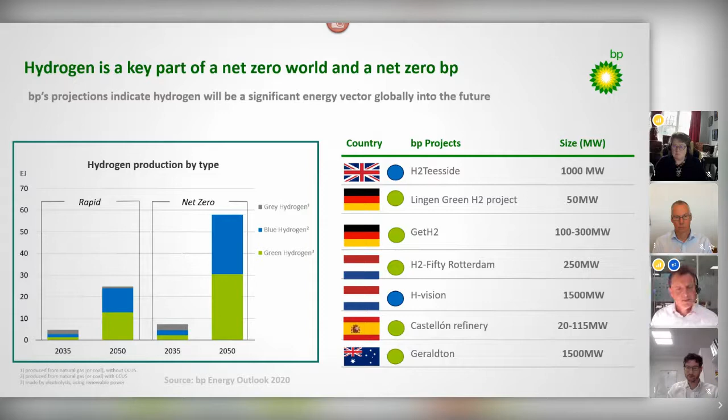Every now and then in a career, you get to work on a project that makes a real difference, and I feel very lucky to be part of the decarbonisation plan for Teesside and the broader Northeast.

BP is the operator for the Northern Endurance Partnership, which is the CO2 store which will underpin the East Coast Cluster. The East Coast Cluster can store 50% of the UK's industrial cluster emissions, which is an enormous step in setting up the UK for a sustainable low carbon future.

Historians among you may recognise Darlington on the map as being the setting for the first steam passenger railway about 200 years ago. 100 years ago, Teesside was responsible for a significant proportion of the world's steel production. As far afield as Australia, the iconic Sydney Harbour Bridge was built with Teesside steel. Today, it's at the centre of a low carbon revolution.

Across Teesside and the Humber, there's the potential for 25,000 low carbon jobs. These are long-term jobs, attracting new businesses, new investors. And one of those new businesses is hydrogen, and particularly blue hydrogen, which is enabled by the carbon capture process.

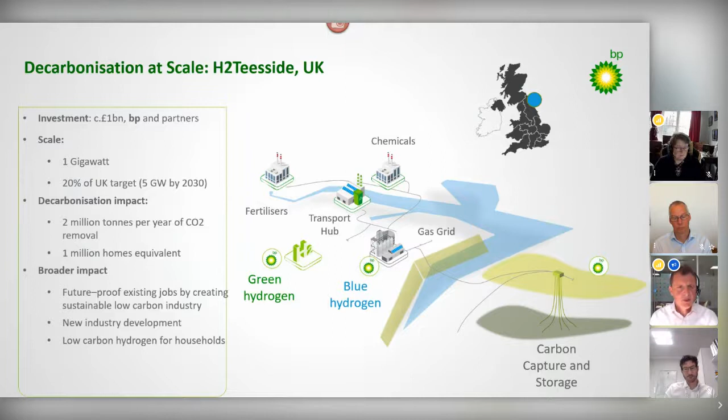But none of this happens without the customers. So on the next slide, I'm going to just touch on some of the key customer types.

In the near term, industrial use is going to be key for adoption of hydrogen across many applications. This is heating, power, chemical input, and the production of new clean fuels. We do believe that in these applications, in fact all the applications on this slide, low carbon hydrogen is the lowest cost net zero option for the world.

We've signed MOUs with a number of customers across a range of industries who all see the benefit of using clean hydrogen. In the longer term, it will become a key element of transportation with uses in trucks, trains, aeroplanes, and ships. For some of these, like trucks, the hydrogen will be used directly. For other cases, like aeroplanes and ships, it will be converted into other clean fuels like ammonia.

This all provides further investment opportunities around the Teesside area, and it is great that Teesside has been recognised as the UK's first hydrogen transport hub, and we're very pleased to be working with the Tees Valley Combined Authority on this.

Lastly, on buildings, we're working with Northern Gas Networks to try and get hydrogen into the gas distribution system. They're making great progress on this, and it does open up the opportunity for everybody to start benefiting from the hydrogen revolution.

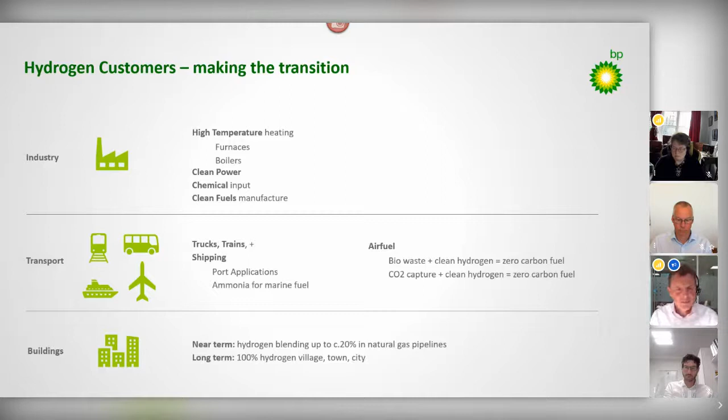So to move to my finishing slide, I'm just going to summarize. Clean hydrogen, it's going to be big. It's happening now. BP's in action across production of green and blue hydrogen, working with customers across the globe. And UK is dear to my heart. I see what's happening in Teesside and it's amazing. We think that's a great place to start the decarbonisation revolution. That means Northern Endurance Partnership for carbon capture and H2 Teesside from a blue hydrogen production perspective.

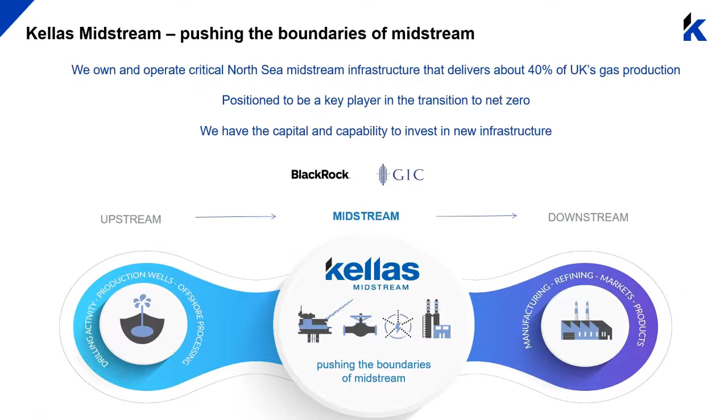So let me talk about our core asset. Our core asset is the Central Area Transmission System, otherwise known as CATS. CATS is a major gas transport and processing system. It gathers gas from around about 30 producing fields in the central North Sea, processes the natural gas at a terminal in Teesside, and delivers the resulting products to market.

So we're incredibly proud of our track record on both safety and environmental performance, and I think the stats on this slide speak for themselves. CATS has an enviable safety record and has the second lowest carbon intensity of all UK gas processing plants. We've also got plans in place to reduce our emissions further over the next 3 years, so that by 2025 we will have halved our emissions from when we first became the owner.

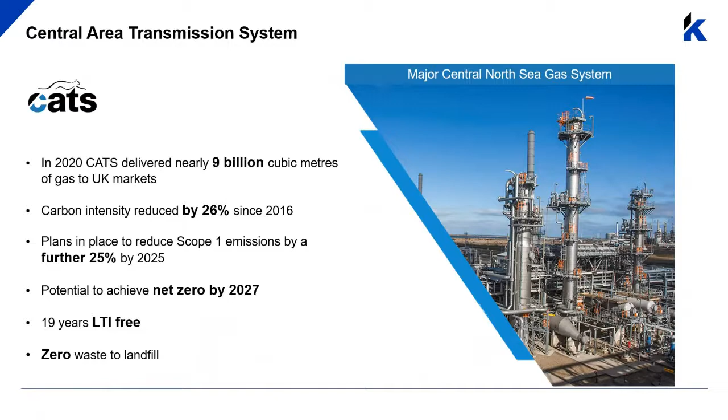But we don't want to stop there. By 2027, we have the potential to make CATS a net zero asset. This brings me nicely on to our exciting new plans for CATS, the H2 Northeast project.

So Matt's already talked about the East Coast Cluster, and we joined it earlier this year, which covers both Humber and the Teesside industrial regions. Matt's mentioned the East Coast Cluster offers us the single biggest opportunity to decarbonise industry anywhere in the country, representing about 50% of carbon emissions from all UK industrial clusters.

H2 Northeast is a 1 gigawatt blue hydrogen plant to be developed at the CATS terminal on Teesside. We'll utilise the Northern Endurance Partnership to dispose of our carbon within the East Coast Cluster, capturing and storing around 2 million tonnes of CO2 per year.

But why the CATS terminal? The CATS terminal has access to natural gas from a range of fields, creating a diverse source of long-term gas supply. It's already connected to the national grid, which makes it ideally suited to blending hydrogen, which is by far the most efficient way of reducing domestic emissions by decarbonising at source.

The CATS site is also an existing industrial site in the heart of Teesside with space for expansion and is operated by a skilled and experienced workforce. So H2 Northeast has the ideal site with direct source of feedstock and access to the industrial and domestic markets, is underpinned by a world-class operating plant and workforce, and has the track record of Kellas and our financial backing as investors to deliver it.

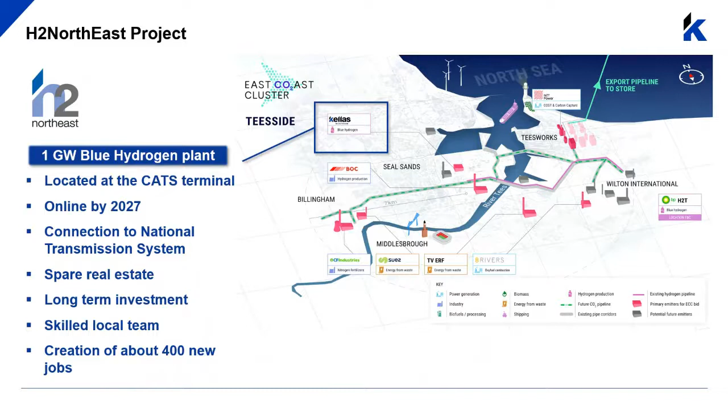So if I can just summarise, where we are: the energy transition requires huge investment over the coming decades, and the oil and gas industry has to be a fundamental part of the solution. Demand for hydrocarbons will reduce, but will not be eliminated, as some hydrocarbon products, such as medical supplies, will continue to be needed. We need the skills and knowledge from the oil and gas industry to deliver carbon capture and storage and to develop the hydrogen economy.

And blue hydrogen is the only way to kickstart the hydrogen economy at scale. Our H2 Northeast project is a great example of how you can transform CATS, an existing top-performing asset, into a net zero asset for the future. Kellas has the track record, skills, and access to capital necessary to make this happen, and we're ready now.

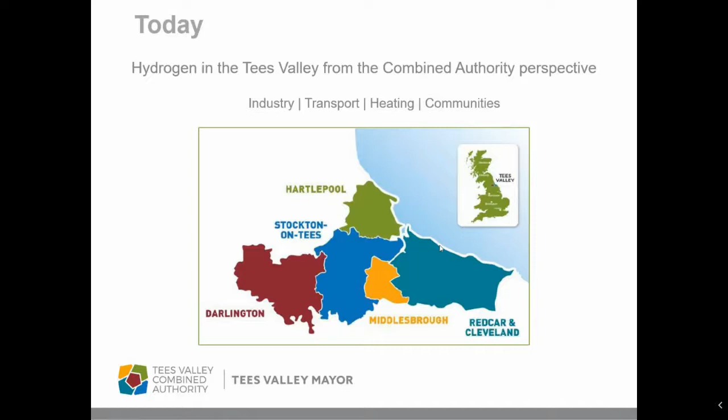So the Tees Valley, in case you don't know, sits in the northeast of England. It's roughly between Newcastle and Hull, and about halfway between London and Edinburgh by train as well - it's a well-connected region. The role of the Tees Valley Combined Authority is to promote the area in terms of the economy, the well-being of people, and create jobs and inward investment.

It's a very, very strong industrial area, and the industry is all tightly packed into the region - I'll show you that on the next slide. It's got a long history, and I was very grateful for Matt describing some of the history way back to the first passenger railway in Darlington and the steel industry 100 years ago. We've got chemicals manufacturing, materials manufacturing, import energy and generation, logistics, and so on. There's a lot going on in the Tees Valley.

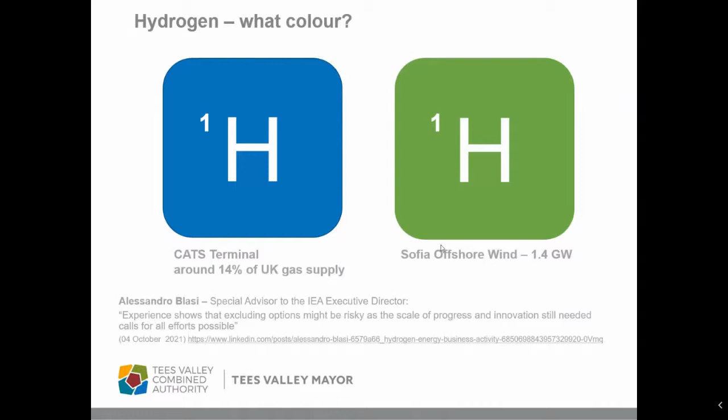So we cover several themes in the Tees Valley for hydrogen. We're looking at the industrial cluster and how hydrogen can be used by industry, we're looking at transport, we're looking at housing, and it's also important to consider the effect on people and communities.

What's going to be very important, bringing hydrogen online as an alternative fuel source, as a new fuel source, is that we have a just and equitable transition here. Whether we call it just and equitable or fair and affordable, it's the same sort of thing. It's not going to put more people in fuel poverty - we've got to help get people out of fuel poverty. We've got to use this opportunity to create jobs and skills, and it's an opportunity to create the green revolution on Teesside and start exporting these skills and technologies as well.

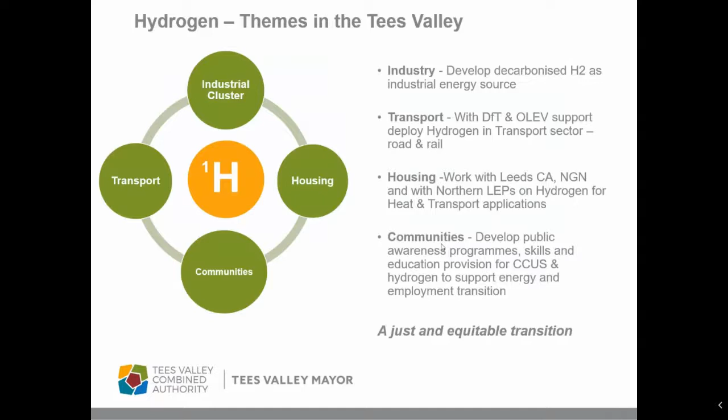In terms of industrial decarbonisation, we're working through the BEIS Industrial Decarbonisation Challenge, funded by BEIS through UK Research and Innovation, Innovate UK. They're funding 6 clusters around the UK with the aim to have 4 low carbon clusters by 2030 and 4 net zero clusters by 2040, and the Tees Valley cluster plan is one of those 6 clusters being funded in this way.

And that's my day-to-day job, working out the strategic cluster plan, which brings together all the different aspects to decarbonisation: hydrogen, renewable electricity, and carbon capture usage and storage, and how these integrate together, how the different industries on Teesside will use these and can work together, and the sort of strategic planning we need to make it real and happening.

Matt also talked about the East Coast Cluster, and they're currently bidding for funding through BEIS's cluster sequencing competition, and we're all eagerly awaiting the end of October when the announcement for the Track 1 clusters will be made.

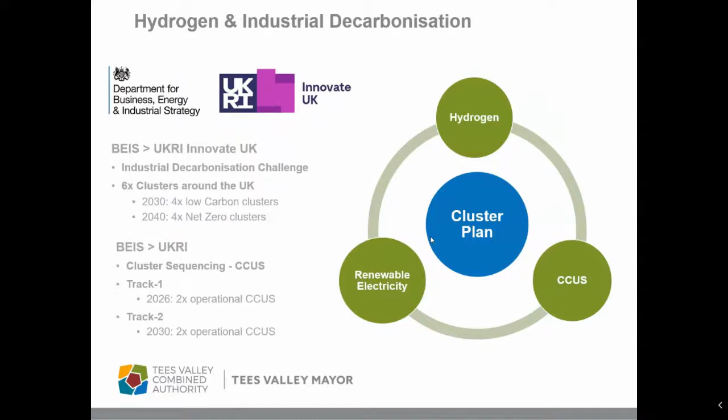In terms of hydrogen transport, we've been designated as the UK's first hydrogen transport hub. We've got 2 hydrogen refueling stations in development in Middlesbrough and Redcar. At the airport, which is partly run by Tees Valley Combined Authority, we have 1 aircraft tug, 2 hydrogen fuel cell cars, and 1 hydrogen converted forklift truck, with trials there to decarbonise the airport ground services using hydrogen.

In terms of housing and communities, Northern Gas Networks is currently working on a project on a former housing estate in the Redcar area. About 70 houses were demolished there around 10 years ago, and all the services, gas mains and so on, still remain in the ground. So this is a really good test site for Northern Gas Networks to test hydrogen in an actual network delivery system for domestic properties. We're also working with Northern Gas Networks to bid for the UK's first hydrogen town—potentially 10,000 homes converted from natural gas to hydrogen heating systems.

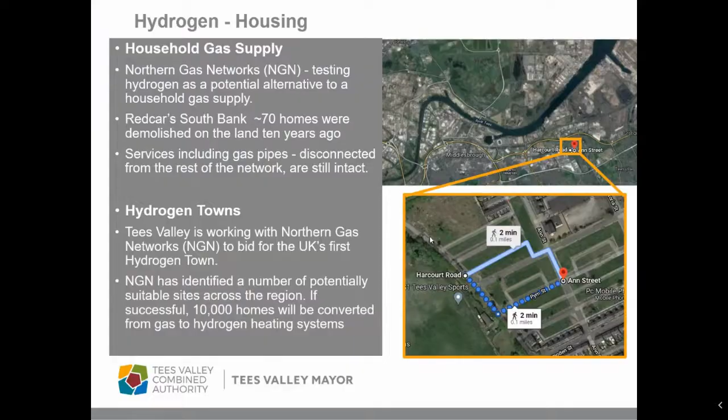Our vision at Tees Valley Combined Authority is to make the Tees Valley a global leader in clean energy, low carbon technologies and hydrogen. The aim is to achieve a net zero carbon industrial cluster by 2040, to provide good jobs with long-term prospects that local people can access. So thank you very much for having me speak today.

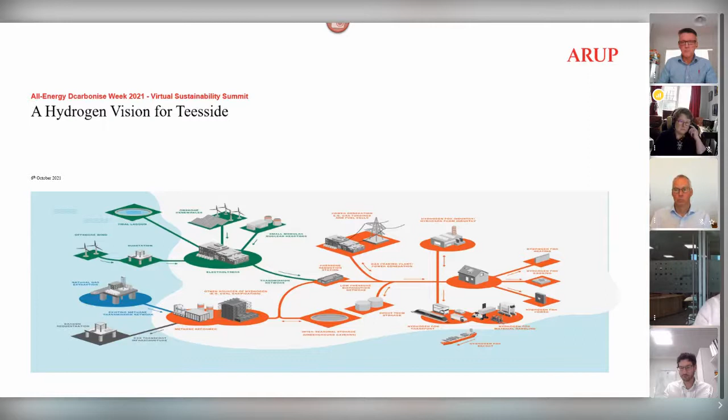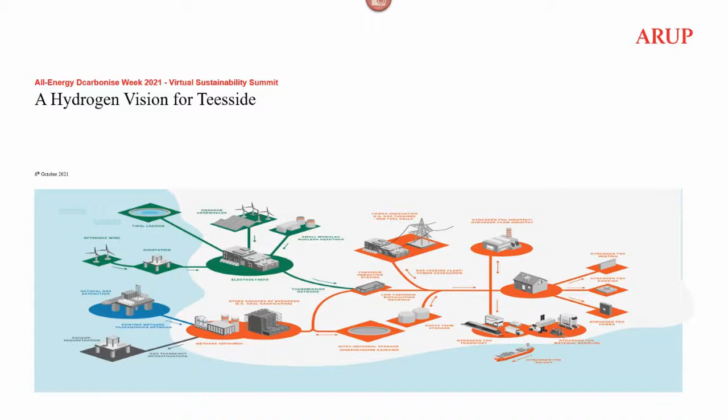So I'm going to talk a little bit about the hydrogen vision for Teesside, and the previous presenters have already given quite a lot of the material away, so I'm trying to gain time and go relatively quickly. What's important when you look at an industrial cluster, of any kind, is to bring together three key components. One is a vision to understand what is the ultimate objective, the ultimate goal of where we want to go. The second is trying to bring the stakeholders together, and finally you need a business case for that particular vision to come together and go forward. Once you've got those three components together, then you have a roadmap to actually deliver it on time, because we are running, as you all said, against the clock in terms of achieving net zero.

If you can go to the next slide, please.

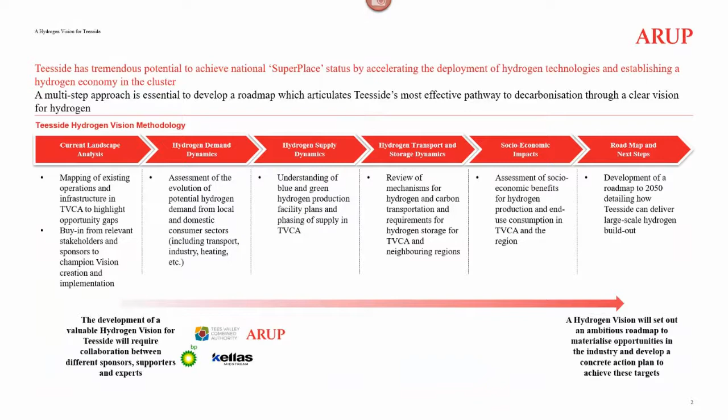Okay, so in terms of the work that we're currently collaborating on with the key stakeholders, we know that these represent a tremendous potential opportunity to achieve decarbonization.

The first step is looking at the current landscape and what is there on Teesside - we've already seen quite a lot of this in what Chris presented earlier around what is in the area. So there's a bit of mapping and trying to understand what's currently in Teesside, and imagining what Teesside might look like in the future. It's an assessment of the existing network, the existing assets, the existing capabilities, and the existing sources of demand, then connecting them to what they might be in 20, 30 years' time. That's the first step - an assessment of what is there and what it might look like.

So we are looking to develop a map of the existing assets and the existing network, and then look ahead, playing around with the various potential options you might have to achieve net zero clusters.

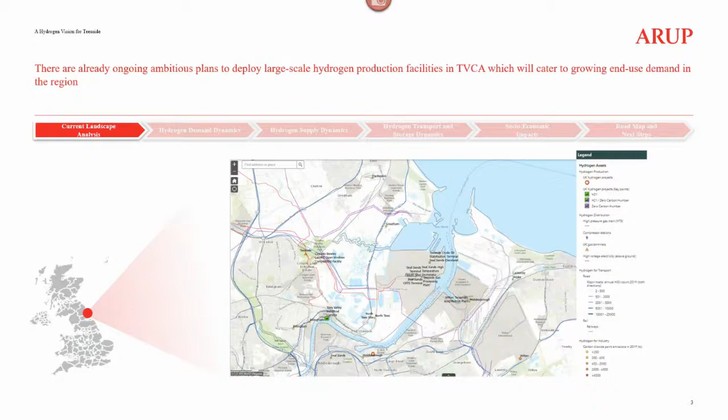So once we've looked at the potential vision and the stakeholders, the next step is trying to understand the business case for the Teesside hydrogen cluster. We looked at it in three parts of the supply chain. So the next slide looks at...

the demand side first - what is the potential demand for hydrogen, how can we estimate that? There are obviously a number of scenarios you can paint. But the first step is trying to understand the current emissions and the future plan for decarbonizing emissions, and the role hydrogen can play in that decarbonization.

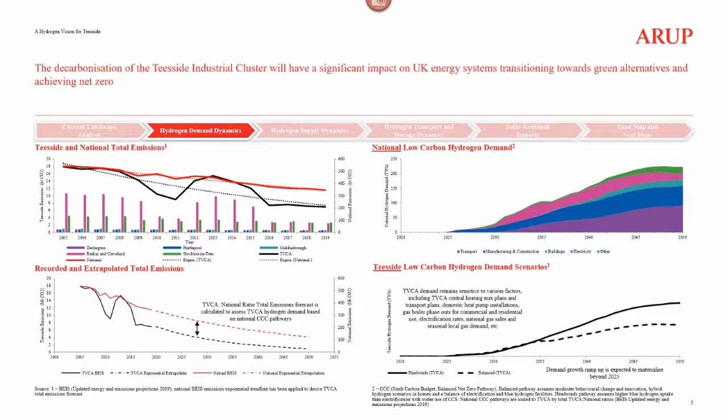Then once you understand the demand a little, you need to look at the supply. So in the next slide, we show this potential supply of hydrogen and where it might come from. You can break it down - here for simplicity, we break it down into blue and green. And as we said before, there isn't necessarily a preference for either - all technology and all components of the hydrogen supply chain will be needed.

But it's more likely - and this is just one hypothetical scenario - that you may have blue hydrogen at an early stage and green hydrogen later on. The combination of those two will vary depending on how the projects we just heard about develop over time. You build up over the first few years and then it tails off in later years in terms of new capacity added to the system, particularly as we move to a longer-term, more green hydrogen future.

And then you combine that with the level of demand, and you could in theory come to a situation where there's an excess of hydrogen produced in the industrial cluster. Therefore Teesside will contribute to the overall achievement of the national hydrogen strategy through export, or through the contribution it may make to other regions as well.

The industrial cluster involves a lot of hydrogen production, which you can then take to other regions as well.

The other component to keep in mind is hydrogen's variability—not necessarily over the years, but also within the year. There are seasonalities and daily demand changes, so the role of the network and potentially storage is going to be very important.

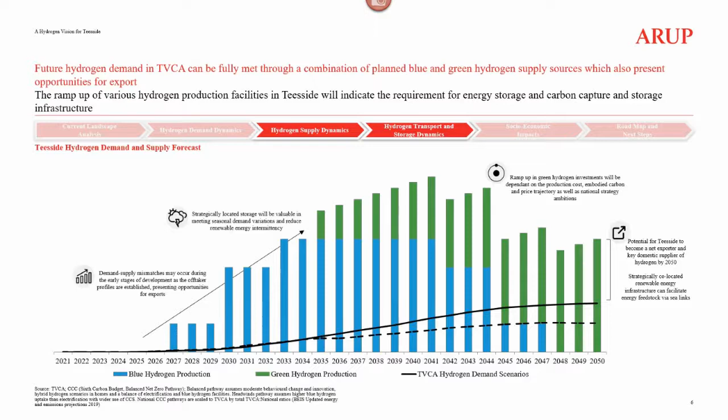It will provide a boost to economic activity. It will probably diversify revenue streams because it will support business growth and also inward investment in companies locally, as Chris was highlighting earlier on.

It provides social benefits by increasing the level of skills and developing a fit-for-purpose labor force, which will support the development of subsectors and emerging sectors. It could become a center of excellence for hydrogen in the UK, increasing that level of potential skills, education, and jobs.

It also has a very important environmental contribution in terms of improving the sustainability of the supply chain, promoting low carbon fuel in the cluster, but also across the UK as well.

There are certain milestones already set by the government and local authorities, but how Tees Valley will fit into that is very important as well.

Thank you. I'll pass it back to the last speaker now—I believe it's Rob, I'm not sure whether Rob is on, I can't see at the moment.

Oh, Richard, sorry. Hi there. Thank you, Filippo, and it's great to be part of this conversation today.

Thank you, everybody. I'm going to shift the conversation very slightly, both geographically and in terms of technology. I'll be focusing now on green hydrogen in a bit more detail, and much more on the Humber, which is where Ørsted is based at the moment for a lot of our offshore wind projects.

I think the first thing to do is set the scene of what that challenge looks like in the Humber. You can look at all the figures in detail here, but as you can see, the Humber is a huge industrial emitter in the UK—by far the largest at the moment—and has a huge industrial base.

It has a lot of similarities with Teesside, which, as well as geography, is also why the industrial makeup is why we're working so closely together on the East Coast Cluster. You're looking at a lot of refining, chemical, steel, and other similar industries.

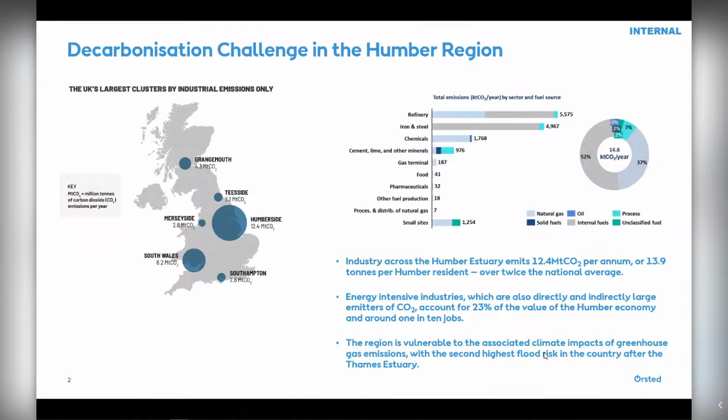And actually, just like in Teesside, as we'll look at in a minute, you have a large number of different consortia working together on different projects looking at the production of storage—companies that need to produce hydrogen, and companies that need to use hydrogen and have the demand.

And you're similarly looking at a number of pipelines, both transmitting hydrogen around the region and also taking their CO2 offshore for sequestration. So there's a huge amount of similarities going on. However, the main difference here for Ørsted is that we're an offshore wind developer and we're a renewables-only company.

Looking at why Grimsby, the Humber, and this area is such a ripe opportunity for green hydrogen - we also call it renewable hydrogen - it's just the capacity of offshore wind that we have in that area. If you add up our Hornsea 3 and 4 projects, which we're developing now, we're going to have a capacity of around 9 gigawatts of offshore wind in the next few years. And that's just Ørsted alone. That doesn't bring in the other developers in the region, and it also doesn't bring in the vast expansion in offshore wind that's going to continue throughout the 20s, the 30s, and the 40s.

There's a phenomenal resource in wind. And it was alluded to earlier as well, there was a large amount of resource further up the coast as well for the Teesside cluster.

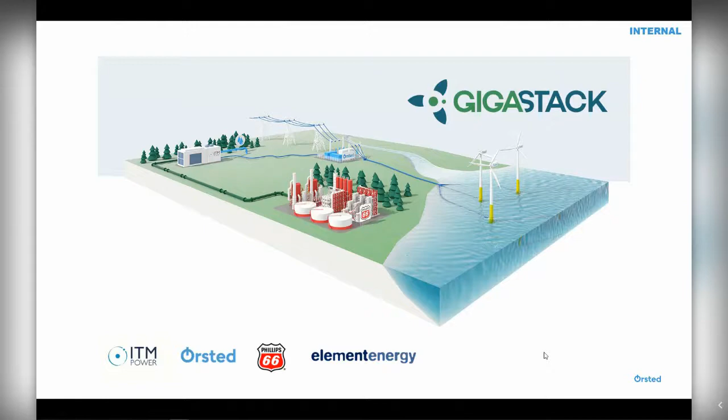And the first project that we're doing, this is our first hydrogen project in the UK - this is Gigastack. For those of you who aren't aware of it, it's going to take renewable electricity from our Hornsea 2 offshore wind farm. It will transmit that electricity.

Something's going on with my slides. I'll keep on talking. We will transmit that electricity to shore.

It will go through ITM's electrolyzers. We're looking at a roughly 100 megawatt project in the medium term. And those electrolyzers, having produced the hydrogen, it will then be transmitted to the Phillips 66 refinery and used in their processing.

At the moment, it's just finished its FEED study stage. It's been very successful and we're looking to take it to the next level soon. I'll come on a little later about what we need as a company and how we need to work together with government if we want to take this to the next stage of the project.

So what have we learned from the project so far? It's been very successful - it's the first of a kind, the first of its scale in the UK by a long way. It's the first time that we and all of these partners together have tried to put all of these technologies and all 3 stages together into one project. There have been the usual number of teething problems you get from a first of a kind project, but I think one of the key lessons for us is they've all been solvable. They've all come through the other side. There've been absolutely no red lines, nothing that makes us think that this isn't possible in the future.

A lot of what we've been doing with this work is looking at not only the technological barriers, which are quite easy to solve, but where are the regulatory hurdles that we need to overcome. The current regulatory system is not yet designed for this kind of project, linking the electricity system with hydrogen production. We've been spending a lot of time working out where you need to place various bits of equipment, where you need to place literally various bits of meters, and how the system's going to need to be tweaked and adjusted if this is going to go forward in the future.

I think one of the other lessons - oh, there we go. I do not know what's happening with my computer, excuse me. If someone has control of my slides, please do move them forward.

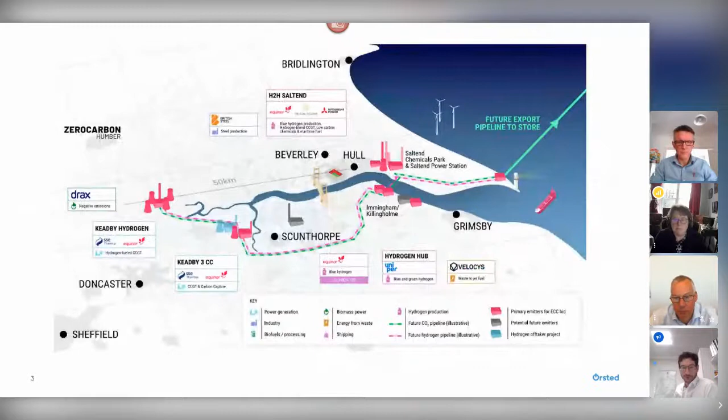And what does this mean in the next stage? What do we need to get this project off the ground? What have we learned? So the first thing that we've observed is there's a lot of positive news coming out from BEIS, a lot of positive news coming out from the government. The 5 gigawatt target is very, very much welcome. And actually the dual approach from blue and green that we see from the government is also very much welcome from us.

I don't see these two technologies as being in conflict with each other. In fact, I predict that a lot of the infrastructure that's going to be initiated from blue hydrogen to begin with, which are slightly further forward at the moment, those pipelines will then be utilised by green hydrogen, working alongside blue further down the line.

I think a lot of what we're seeing, though, is at the moment, whilst a lot of the various revenue models that are coming through and the various plans that are coming forward are working very well for blue, the detail's not yet there for green. And what we really, really urge from the government is to get that detail.

Again, it really should be noted that there is a lot of attention coming from BEIS and a lot of work going on with this in the background. With everything that's been going on in the last year and a half, it is not surprising that things are slightly delayed from where they are. And actually, when I speak to various of my colleagues in other countries around Europe, they're seeing similar things. Things are slightly delayed at the moment.